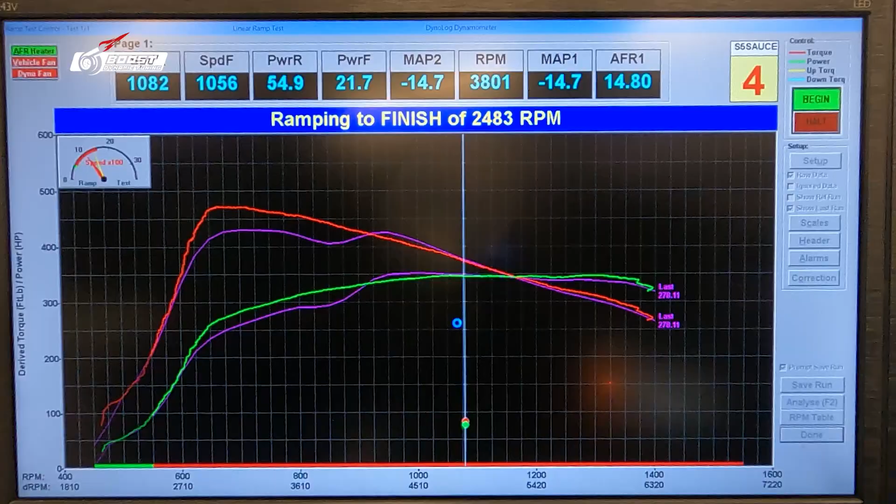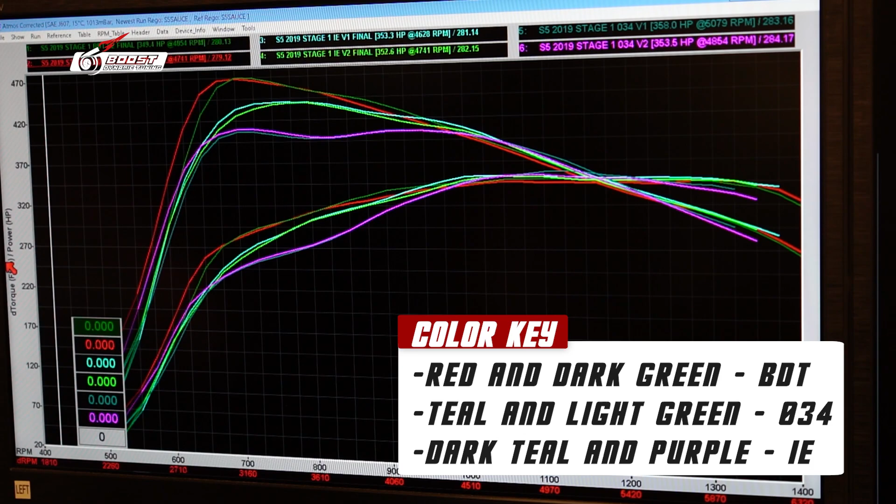Alright guys, here is the data you've been waiting for. As you guys see, the colors differentiate whose tune we are rocking. This is version 2, meaning the second pull. Version 1 is the first pull.

Coming up here, we're kind of taking the early-on torque pull. I mean, obviously this is horsepower. So we're ripping it in the beginning at 3,000 RPMs, giving all that power, and then we're going to start tapering it down. Now let's look at everybody else's here.

IE right in the middle at 262, 257, not too shabby. 20 horsepower difference is a big difference to me. And if you guys look in the video, they actually spike higher boost, but we'll go see the computer in a second to actually see what it shows.

Other than that, you guys see we come on pretty hard. Version 2 still gaining power. We're 7 horsepower even on the second pull when we should be hotter and running less power.

Now this is where everybody kind of mixes together. So at 4,600 RPMs, I mean, come on guys, we're pretty identical. 4 horsepower difference between all of them. Coming here at the end, 5,000 RPMs, 034 is doing pretty good.

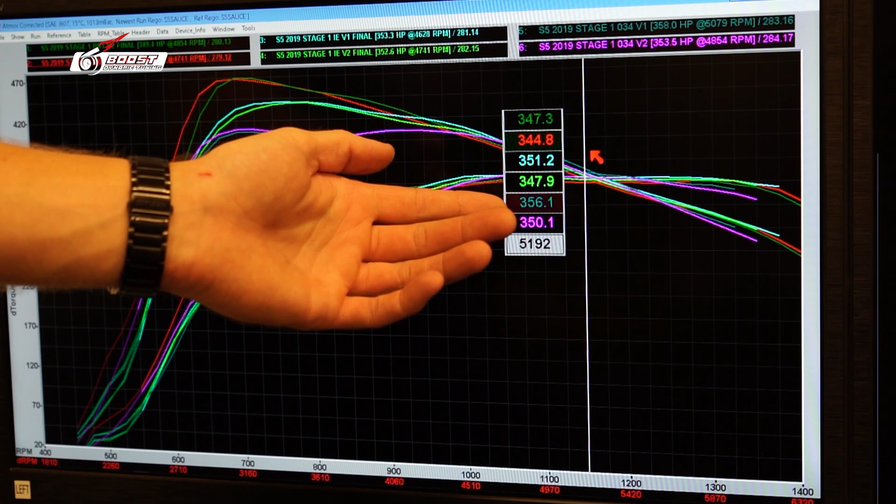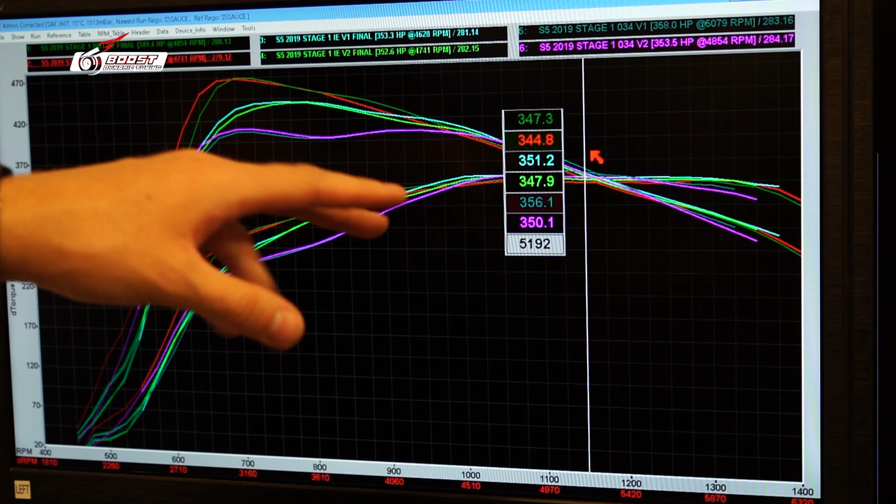They like to gradually raise the power at the end of the power band. So you guys can see they're making the most horsepower, but on the second pull, dropped 6 horsepower, which is very minimal. Don't forget, this could be dyno error. So I pretty much say anything between 0 and 8 horsepower, don't even look at it as a difference.

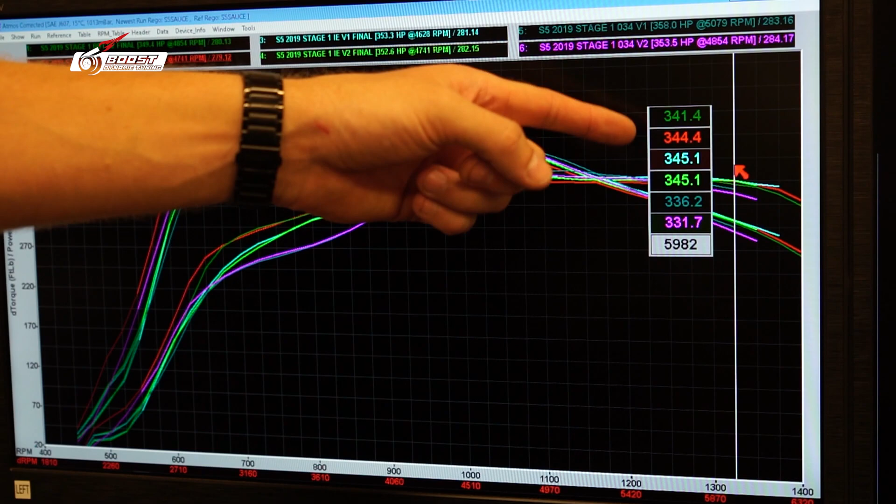We all are pretty much matching identical. When you get to the end of the run here, who's running the most power? Well, IE is not doing too shabby, continuing the power, but like what I said, okay, we got a 1 horsepower difference, a 4 horsepower difference, that's nothing.

Coming over here, we're seeing close to a 10 horsepower difference, so there is a little bit different. IE is still pulling the power through the end of the power band. 034 is dropping off a little bit, and I know I'm tapering off boost at the top end. So there is the data side of it.

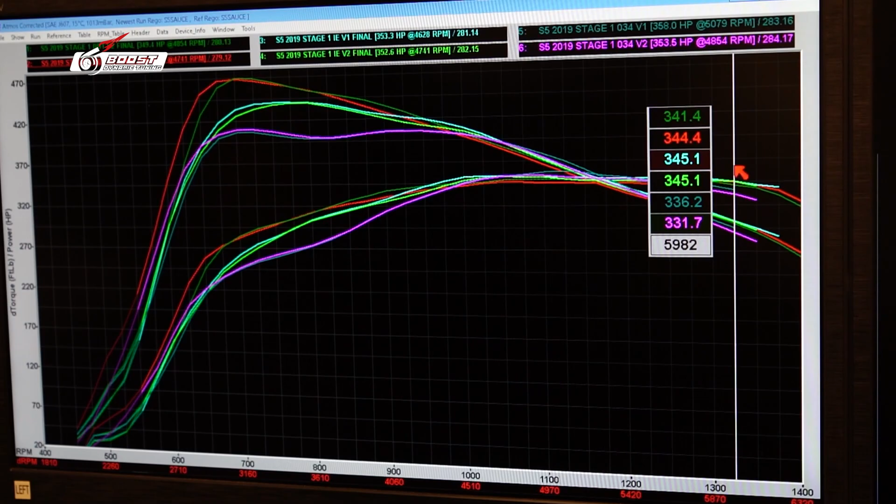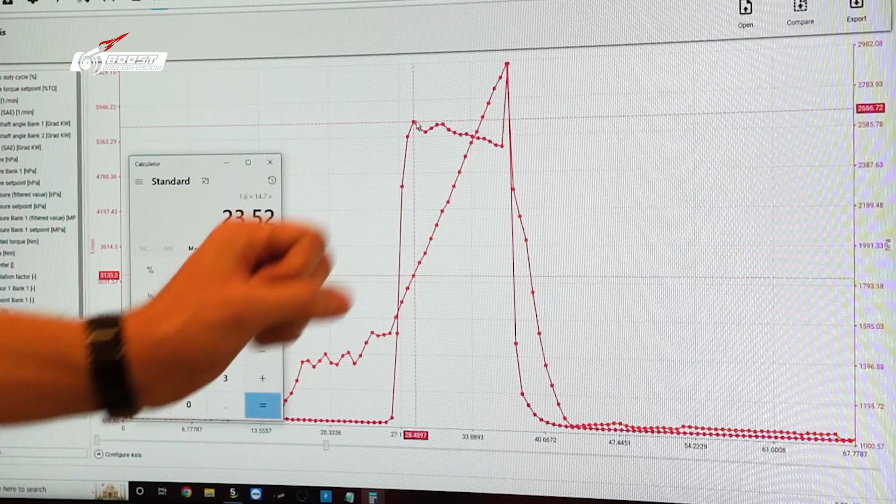Let's go show you the actual logs of the pulls. Alright guys, here's BDT's version 1 log. As you guys can see, we are spiking at 3,135 RPMs, 2,600 millibar.

That converts to 23 to 24 PSI. I'm going to taper it off right at me letting off the throttle, 6,500, which is 25, 23. There we go, tapering down to 22. So I'm going to spike 23, 24, and I'm going to taper it down to 22. Depending on intake air temperatures, that could be different depending on if it's colder or hotter.

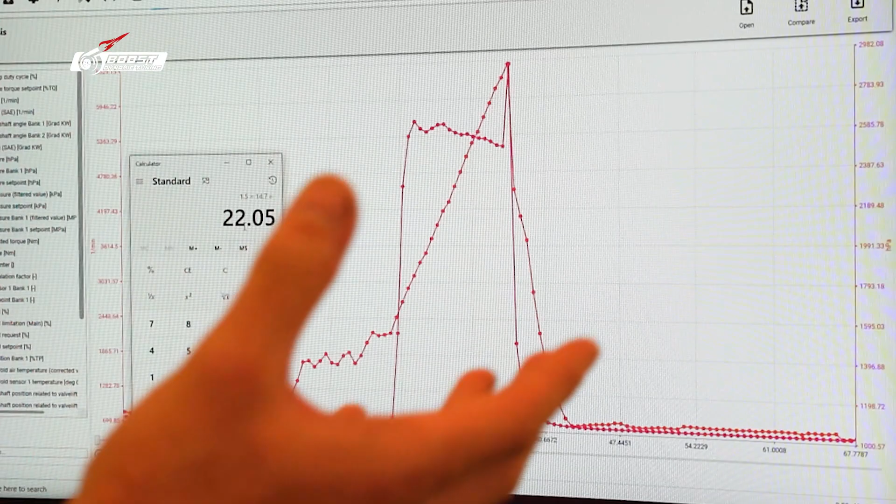Moving on to the good stuff here, throttle plate open 100%, pretty good. Where's the biggest one? In ignition angle. That's pretty much what you guys are going to look at here. Coming through the beginning of the power band at 3,300, we're at 6 degrees timing. Up at the top end, we're hitting 15.5, not too shabby.

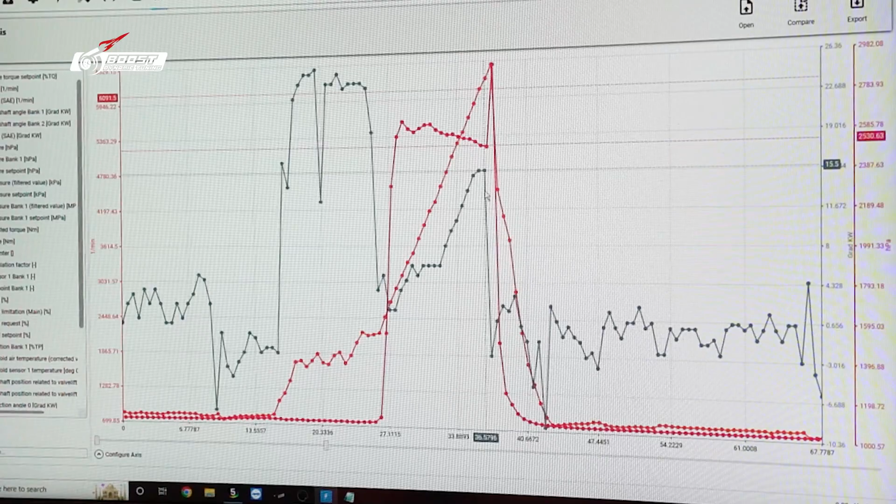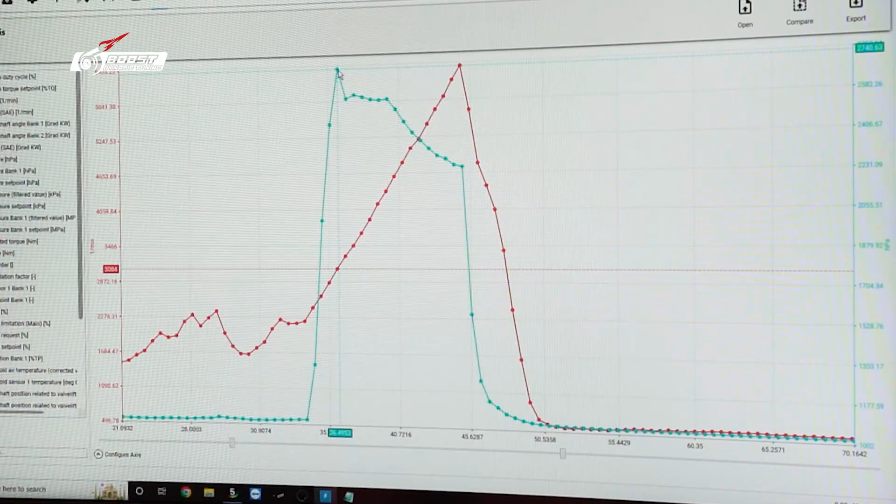Alright, let's move on to the next. IE version 1, let's see what boost levels they are hitting here. A little better for you guys to see this. Alright, so they are spiking 2740. So let's get the calculator back out.

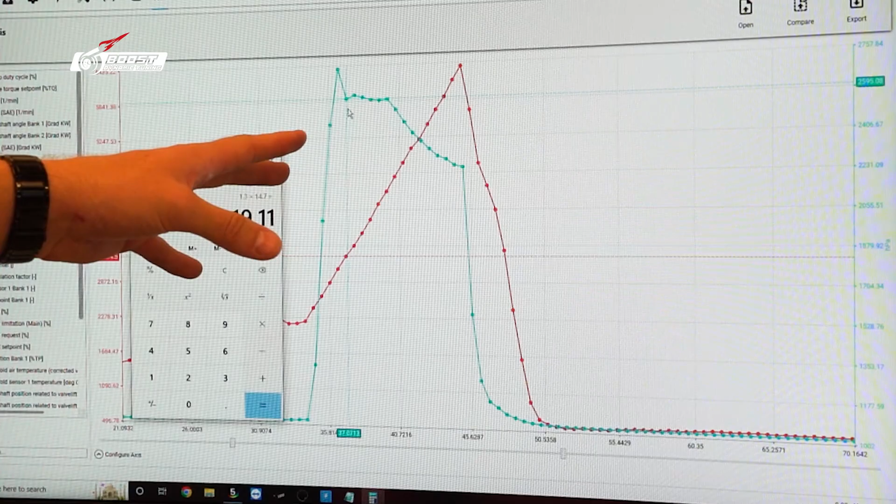So they are spiking 26 PSI, right around there, and tapering off to about 23, then down to 22, 21. They are spiking it up to 25, so they are raising the boost higher than we are, but yet we are making more power.

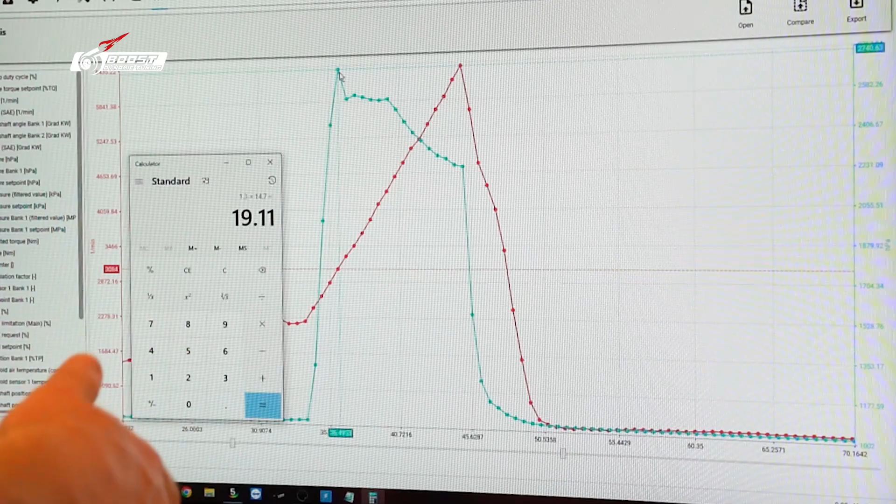It's because, guys, boost is not everything. Ignition timing is a big factor. Let's show you what the ignition timing is doing here.

So they're starting out at 3,000, 3,500 RPM at 0 degrees top dead center. I think on mine I was right around 4, 5, 6. At the top end, they're at 15 degrees, and that's right where I am too. The engine cannot be pushed anymore.

That's really the maximum timing you can run on a 93 octane tune in these hot temperatures. Okay, let's look at intake air temperature here. At the beginning of the log we started at 33 Celsius, dropped down to 31, and rose up to 36 at the end of the pull. You can see it's getting hot because they're running high boost. If you run high boost at the top end, you're gonna get high intake air temperatures.

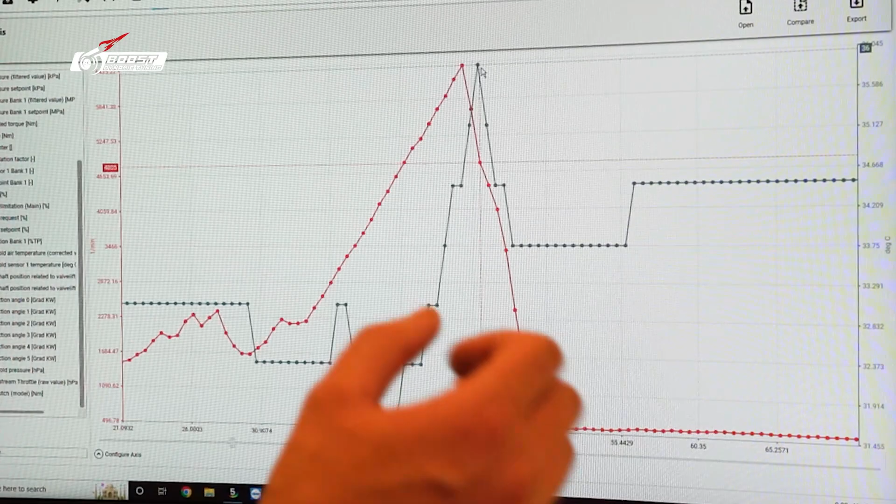All right, let's jump over to 034. What are you guys running? Boost pressure, look at that beautiful curve. Like I told you guys, they bring it in gradually, which doesn't look too gradual here, and then it rises up. Kind of weird, honestly. They're raising the boost pretty high, yet on the boost gauge I don't remember seeing that, but I saw it coming up. So let's do the numbers here.

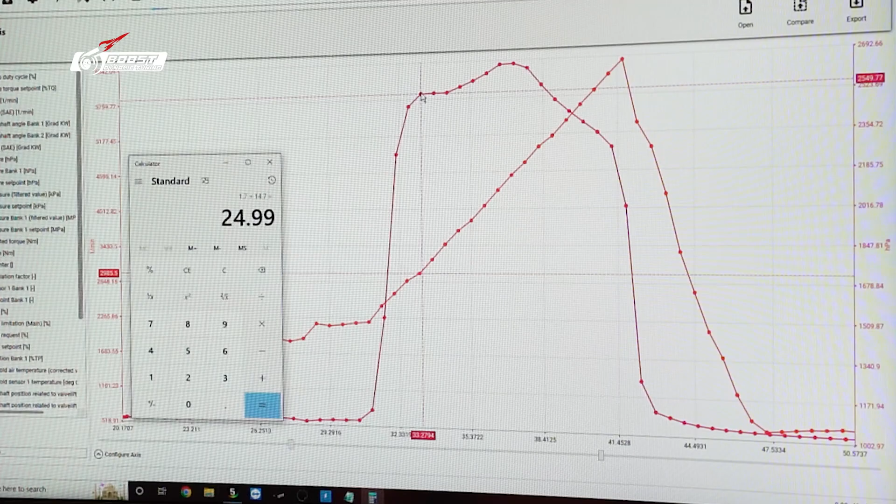Spiking 22 to 23 PSI at 3,000 RPM. So they really did bring in the boost, but they had no ignition timing is my guess. We're about to find out with the log. And then they're gonna taper off at the end of the pull here, pretty much 2,300, 19 PSI. So 23, let's see their highest, call it 27 here, so 25. So 22, 23, and then 25, and then tapering it down to 22.

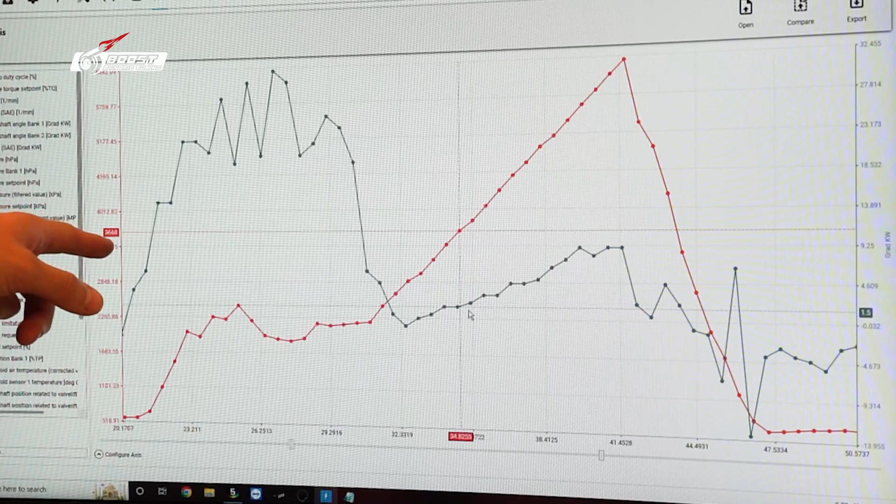Not too shabby. Now the sauce, the ignition timing. They're pretty low here. At 3,000, like we were showing on other tunes, I'm running about 4 to 5 degrees. They're running 1.5. Up at the top end, we're running at 9 degrees. That's not a lot of ignition timing at the end. You guys saw we were running 15.5. So this is a nice moderate tune. They're not pushing it too hard.

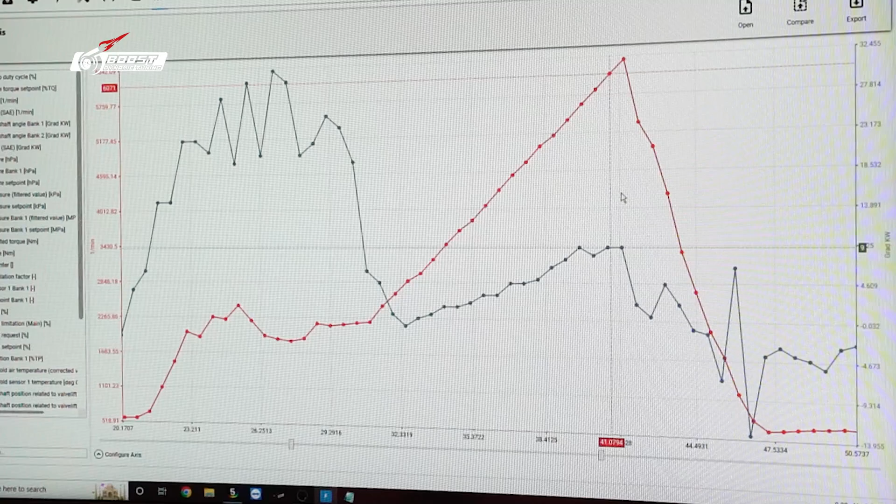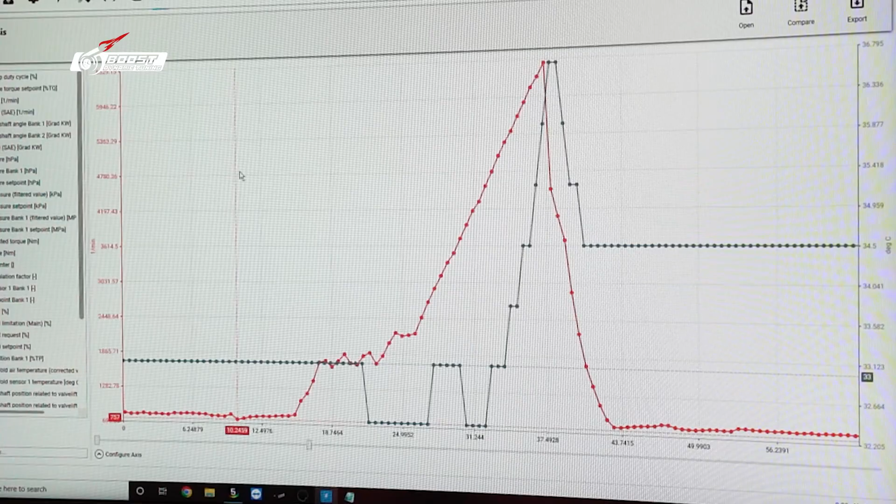There you go, guys, that is the data side of it. Well, guys, the data's in. Did that really show you what you wanted to see? I hope so. I really tried to go in depth and not miss anything, but guys, there's a lot.

I'm holding a boost gauge, I'm turning on the dyno, and I got a log on the computer. So bear with me, but you guys can see I did these runs back to back to back, same temperatures. I have the same car and same fueling. What else can you mix up?